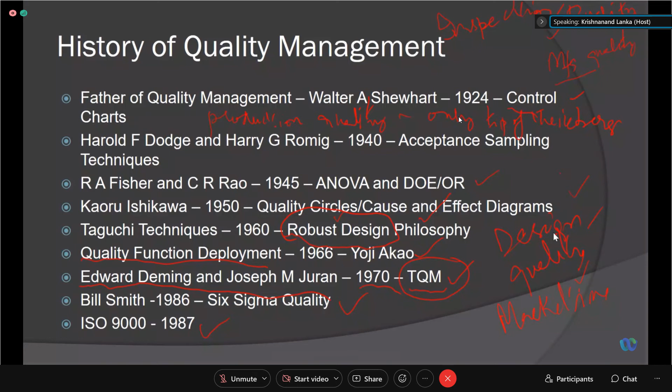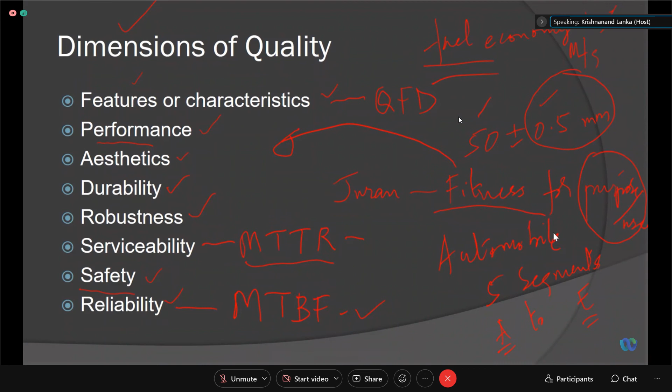Right now, let us move on. We talked about robustness, serviceability, then features or characteristics, performance. Then we said there are various types of costs involved: prevention costs, appraisal costs, internal failure costs, and external failure costs. All right. So these are the various quality costs. So we try to minimize internal failure costs and external failure costs because they are very dangerous for the long run survivability of the organization. Particularly, external failure costs are dangerous because you are likely to erode your brand value.

After the customer receives the product or the service, you should see that whatever the customer gets is free from defects. But what people say is, if you are really good at delivering good goods to the customer, it should actually delight the customer. Forget about seeing a defect. In fact, you should be doubly surprised by the quality of the product. In fact, you should delight.

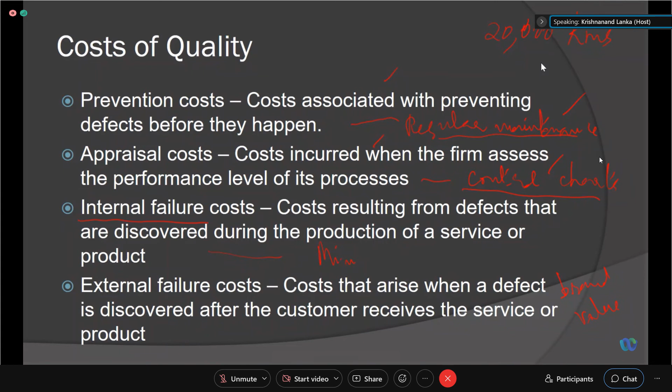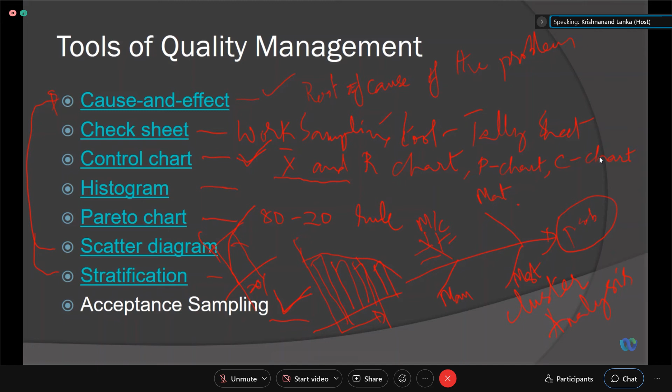So anyway, we have these various tools of quality management like cause and effect, check sheet. Out of these, we will be mainly concentrating on control chart and acceptance sampling. The rest we will not concentrate on because of the limited time available. Apart from control chart and acceptance sampling, we will be dealing with QFD and a surface treatment of TQM. Okay. So now let us proceed.

So statistical quality control techniques, these statistical process control techniques, are a contribution of Walter A. Shewhart. I told you, he invented them in 1924. This Walter A. Shewhart used to work for Bell Labs.

Once upon a time, they say Bell Labs was the most innovative laboratory in the world because on average they used to register around 10 patents per day. That's why major inventions have come from that lab, whether you take Unix, C language, the semiconductor transistor, laser. In fact, Bell Labs never boasts about their contribution with respect to statistical process control charts. It is just a one-liner. They never boast that this is an important contribution by them.

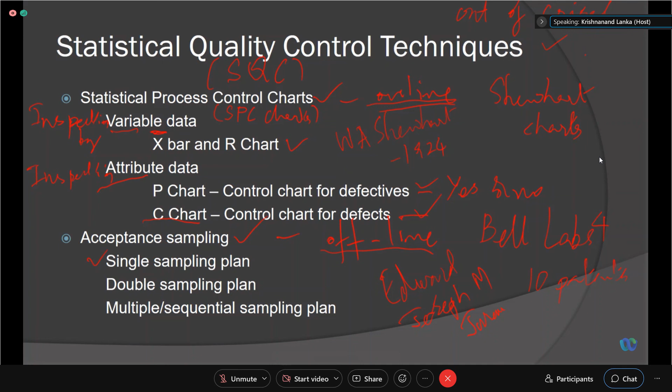So single sampling plan and double sampling plan have really helped mankind reduce inspection overheads. Now let us go to the first case: uses of statistical process control charts. Why do we have to use them? One use of statistical process control charts is controlling the process.

In fact, take any process, whether man-made or natural, every process has some kind of variation. Even nature is a process. For example, if you measure the IQ of all people, it follows a normal distribution. If you measure the heights of people, again it follows a normal distribution.

That means variation is a fact of life. Any process doesn't give its output at an exact value. In fact, that is why we had to introduce the concept of statistics, the concept of tolerance.

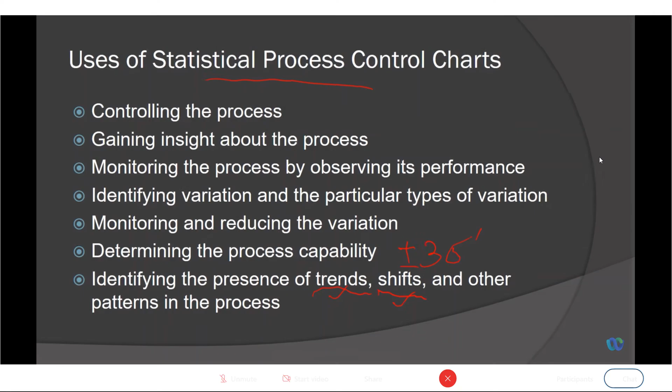That ailment may be breakdown of the lubrication system, a worn out bearing, or the cutting tool getting blunt, or the gearbox having play because of wear of the shaft or gear teeth. So sometimes certain causes are silent. They're not visible. But the moment you maintain SPC charts, statistical process control charts, they will tell you the process is likely going into some kind of uncontrolled situation. Be careful. That is the beauty of SPC charts.

They have the so-called predictability of the health of a process. They can monitor the health of a process. As I told you, a particular tool, process or subject is matured when it has that predictive capacity.

In fact, Shewhart used to say that every process keeps on telling its story. Unfortunately, you don't know its language, hence you don't understand its story. So the language you should master to understand its agony or happiness is, first of all, statistical process control charts. Then you gain insight about the process.